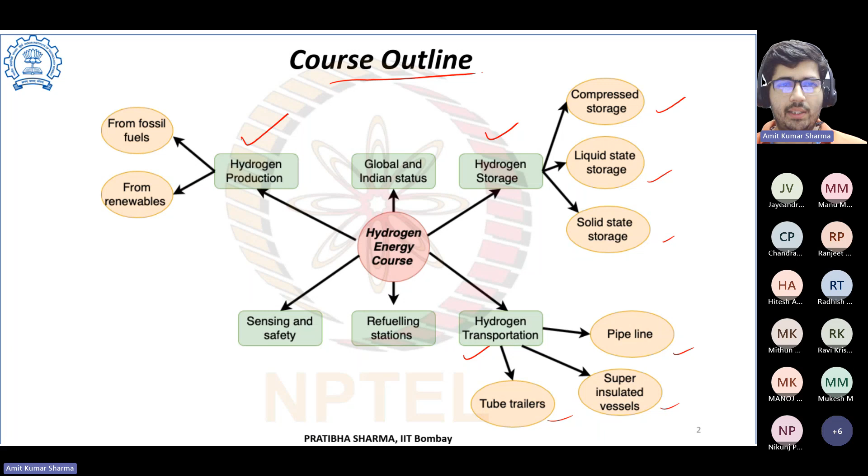So these are the areas which will be covered in this course. Today we will discuss week 2.

But first, last week there was a query regarding orthohydrogen and parahydrogen. So basically, the normal hydrogen mixture is having 75% orthohydrogen and 25% parahydrogen.

In orthohydrogen, the nucleus spins are parallel, and in parahydrogen, the nucleus spin is anti-parallel. This is the main difference between ortho and parahydrogen. Due to the parallel nuclear spin, they are having very high energy state as compared to parahydrogen.

So when you want to liquefy the hydrogen, you need to convert this remaining orthohydrogen to parahydrogen. Also, due to the different nucleus spin, they have different magnetic properties.

So parahydrogen is used in different magnetic techniques like MRI scans and also in NMR spectroscopy. So these are useful in these techniques, and they have some other uses too.

So to convert ortho to para, you need to decrease the temperature, and also you need a catalyst, so you can convert into parahydrogen.

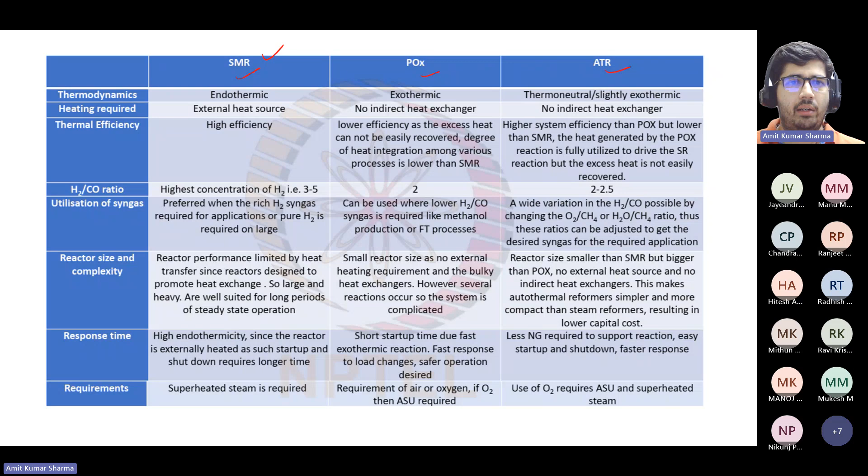We have covered steam methane reforming, partial oxidation, and autothermal reforming. We have also covered dry reforming, bi-reforming, tri-reforming. Let's see the major difference between these three first: steam methane reforming, partial oxidation, and autothermal reforming.

From the thermodynamics point of view, steam methane reforming is endothermic. What is the meaning of endothermic? Input heat will be required. And what is the input heat required for the SMR?

It's combustion fuel heat, we burn fuel only. And what is the amount of heat required? 206 kilojoules per mole will be required for the steam methane reforming.

The partial oxidation is an exothermic process, so it will release heat, and autothermal reforming is a combination of steam reforming and partial oxidation, so it is thermoneutral or slightly exothermic.

So basically, the heat that is required in steam methane reforming, we can use partial oxidation's released heat for the steam methane reforming. So it is a combination of both steam methane reforming and partial oxidation, thermoneutral or slightly exothermic.

Heating required: in SMR, external heat source is required. We need to supply external heat source. We can use flue gases and a heat exchanger, or we can also burn the methane. If you have some other heat source, you can use that to maintain the heat.

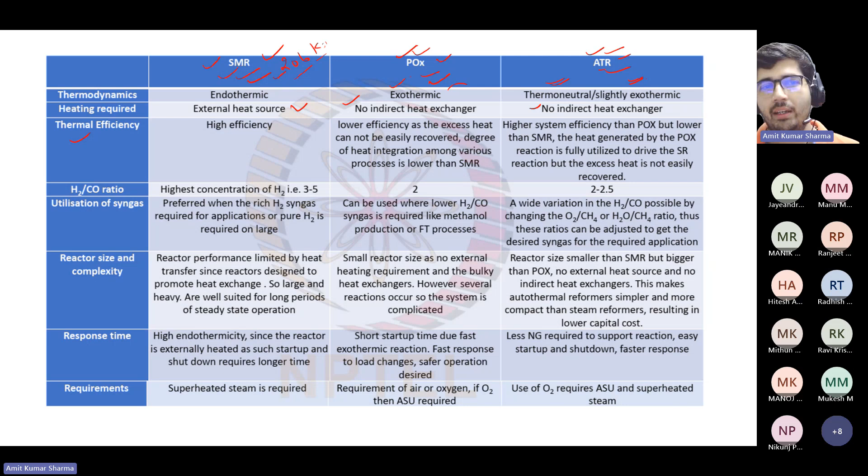Now the thermal efficiency: steam reforming has very high efficiency. Partial oxidation has lower efficiency because the excess heat cannot be easily recovered, since it is exothermic. Heat is a lower grade energy and it's difficult to recover.

It will also increase the cost because to recover the heat you need to install heat exchangers, which requires cost. The degree of heat integration among various processes is lower than SMR. In ATR, there's higher system efficiency than partial oxidation but lower than SMR, so it is in between.

The heat generated by the partial oxidation reaction is fully utilized to drive the steam methane reforming reaction, but the excess heat is not easily recovered. So some heat is used for the steam reforming and excess heat is not recovered.

Now the H2 to CO ratio. For SMR, it is the highest, with concentration of H2 being 3 to 5. For partial oxidation it is 2, and for ATR it's 2 to 2.5.

This is actually a very important parameter because some processes require a particular hydrogen to carbon monoxide ratio. Based on the requirement, they can select SMR, partial oxidation, or autothermal reforming. Sometimes if efficiency is important, they will go for steam methane reforming. But sometimes for a particular process, we require a particular H2 to CO ratio. If we don't have the exact ratio, then we need to maintain it, and in maintaining that ratio, we may need to expend more. So it's better to use a proper reforming method to directly get the required H2 to CO ratio. Based on that, many industry players select the reforming method as per their requirement of H2 to CO ratio.

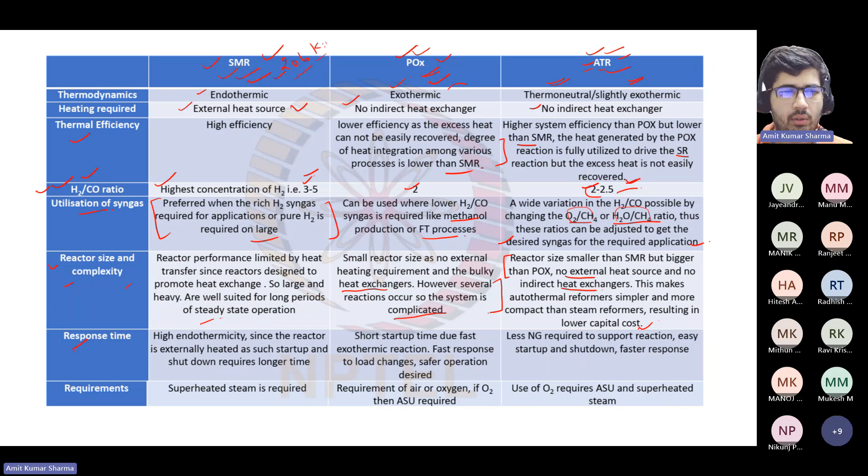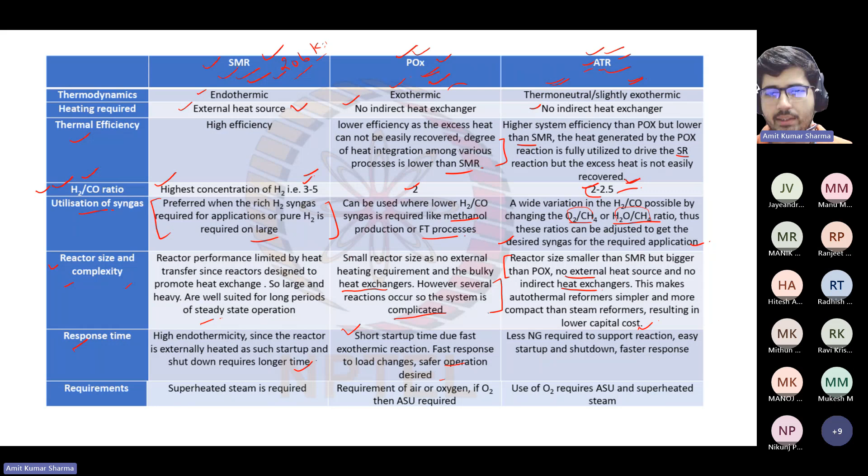Response time: SMR has high endothermicity, since the reactor is externally heated, so startup and shutdown require longer time. In partial oxidation, there's short startup time due to fast exothermic reaction and fast response to load changes, though safer operation is desired. In ATR, less natural gas is required to support the reaction during startup and shutdown, and there's a faster response. So basically ATR is better in terms of response time.

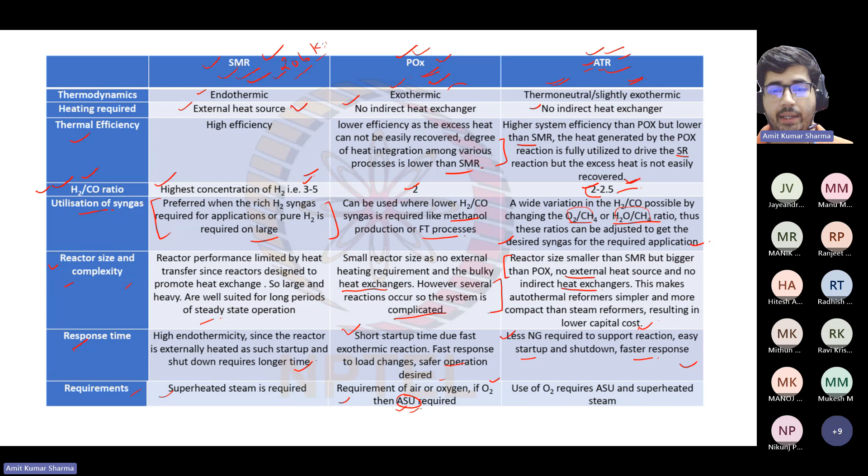Requirement: superheated steam is required in steam methane reforming. Requirement of air or oxygen - if O2 is used, then an air separation unit is required, because if you require pure O2, you need to separate out the nitrogen; otherwise, since nitrogen is inert, your product will have nitrogen also, which you may not require, so you need to install an air separation unit to separate the nitrogen. In ATR also, use of O2 requires an air separation unit and superheated steam - it's a combination of both, requiring both superheated steam and the air separation unit.

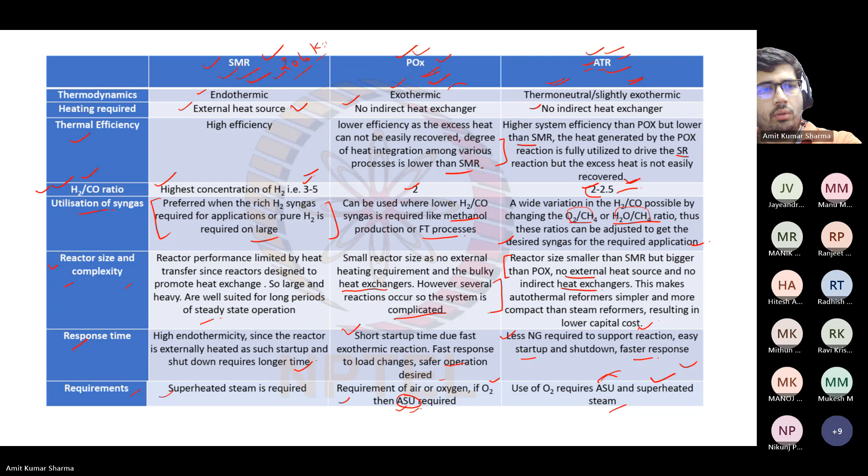So regarding the overall system, the SMR is heavy and large system. Partial oxidation is compact but complicated. ATR is simple and compact.

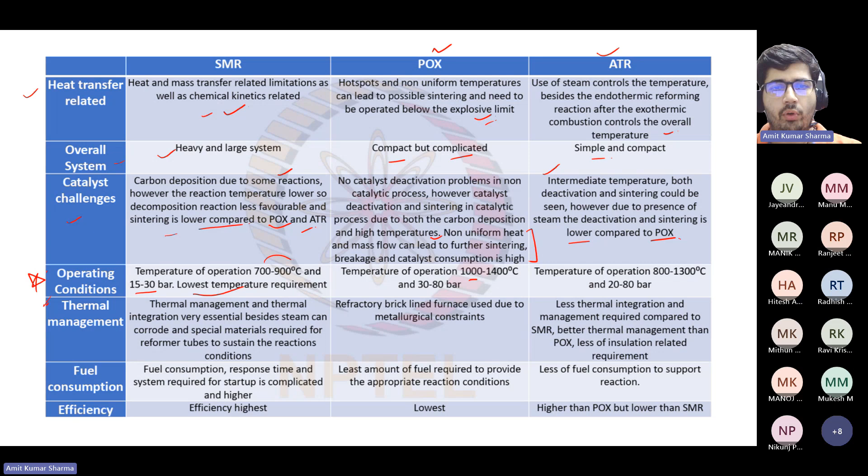Operating conditions are important. SMR is operated between 700 to 900 degrees centigrade and 15 to 30 bar, with the lowest temperature requirement. Partial oxidation operates at 1000 to 1400 degrees centigrade and 30 to 80 bar. ATR operates at 800 to 1300 degrees centigrade and 20 to 80 bar.

Thermal management: as we can see from the operating conditions, the temperature for SMR is not that high, so the management will be easier compared to these two processes. Thermal management and thermal integration are very essential.

Besides, steam can corrode, so special materials are required for reformer tubes to sustain the reaction condition. Because we are using so much steam, you need to also look into the corrosion aspect.

Partial oxidation requires refractory brick lined furnace due to metallurgical constraints. Because the temperature is very high, using a metal reactor will be difficult due to metallurgical constraints. So it's better to use a refractory brick lined furnace.

ATR requires less thermal integration and management compared to SMR. It has better thermal management than partial oxidation and less insulation related requirement, because the generated heat will be used for the SMR reaction.

Regarding fuel consumption, response time, and system required for startup - these are complicated and higher for SMR. It requires higher fuel, and also the response time is higher.

The least amount of fuel is required in partial oxidation to provide the appropriate reaction condition, with less fuel consumption to support the reaction.

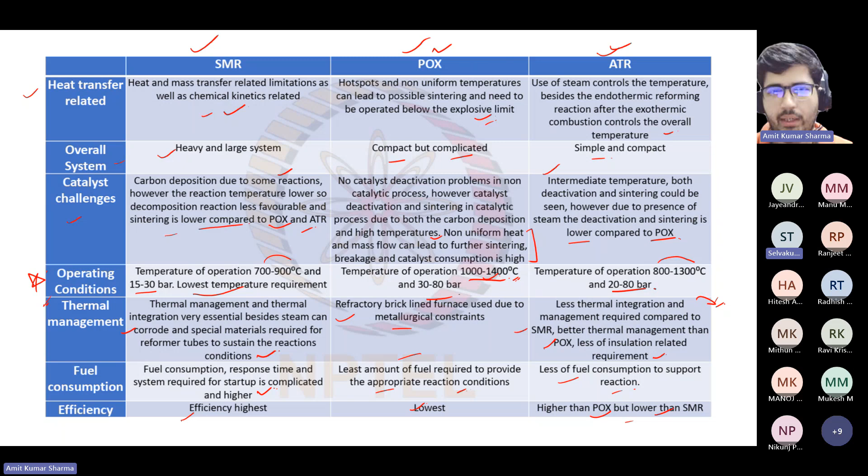Dry reforming we will come to later actually during the question, so at that time we will discuss that. Now we have covered steam methane reforming, partial oxidation, and autothermal reforming. The remaining reforming methods will be covered in between the questions.

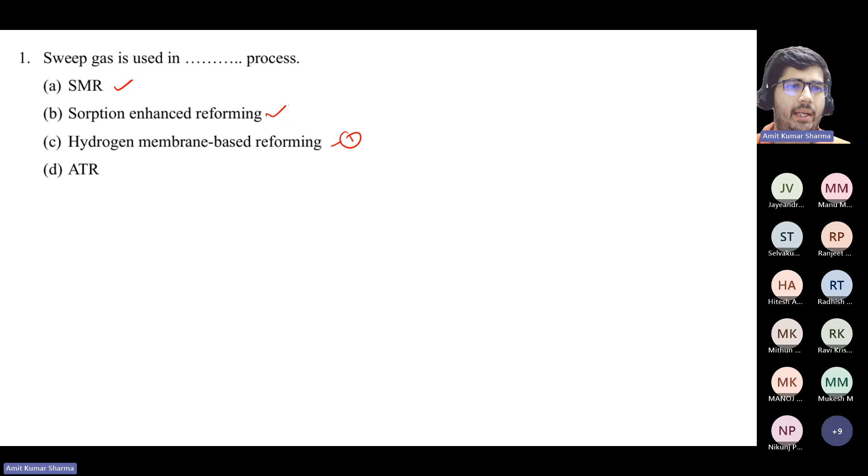What about ATR? As we discussed earlier, ATR is a combination of steam methane reforming and partial oxidation. So we require steam, oxygen, reactor, catalyst, and feedstock - these are the basic things.

Now let's come to hydrogen membrane based reforming. So what is this?

It is just opposite to the sorption. Here we take out hydrogen only through this membrane. The membrane is selected in such a fashion that it only allows hydrogen to pass through. And just to maintain pressure difference, we sometimes use sweep gas.

This is important, so to maintain the pressure difference - what is the meaning of pressure difference? Do you want to explain it more? Where do we use the pressure difference in membrane based reforming?

I was going through that video lecture, and in the construction there is a two drum kind of arrangement. All reactants are input in the outer drum, and then hydrogen passes through the inner one. So between both the drums, there has to be some pressure difference, only then will that membrane act. This is right, roughly how I have understood it.

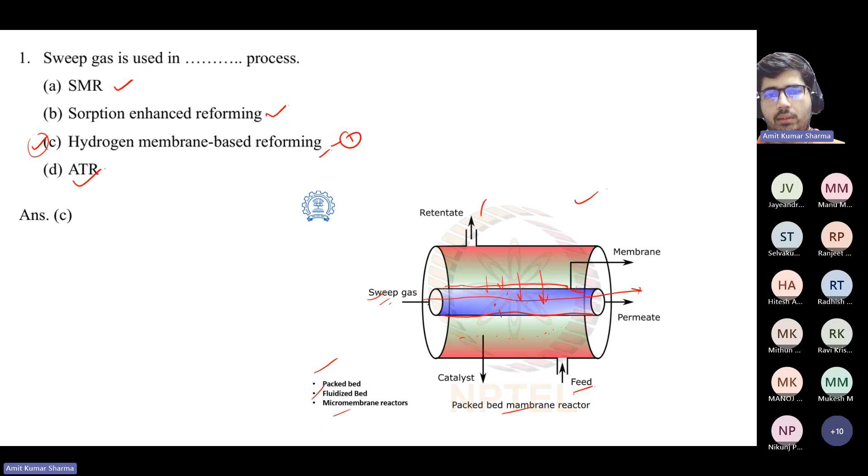So in the hydrogen membrane reactor, you can see the basic reaction of CH4 and H2O. It is the reaction of steam methane reforming, which converts into CO and H2. The removal of H2 favors the forward reaction.

Because whenever we are having reforming, there are also some side reactions. If we want to favor the forward reaction, we have to remove the hydrogen. So if we continuously remove the hydrogen, there will be less product available for the reaction, so that it will not take part in the side reaction - only the forward reaction will be favored.

Also, the conversion of CH4 is the same as conventional SMR, but at milder conditions. In the hydrogen membrane reactor, the conversion of CH4 is similar to steam methane reforming, but at milder conditions - you don't require that much temperature. Higher conversion, but at the same operating condition as that of conventional SMR.

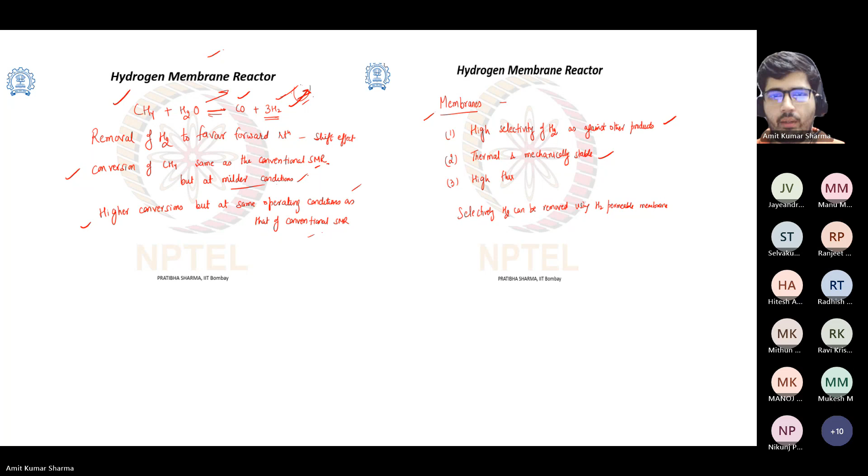Also regarding the membrane, it should have high selectivity of H2 against other products. Whenever you select the membrane, it should have high selectivity of hydrogen. It should be thermally and mechanically stable. These are also the conditions regarding the membrane - it should also be economical.

So basically the transport mechanism of hydrogen inside a palladium membrane: if you have a palladium membrane, it follows a solution diffusion mechanism. Hydrogen molecule is adsorbed onto the surface of the membrane, then it is split into hydrogen atoms. These atoms go across the membrane through diffusion and then recombine again into hydrogen molecule on the low pressure side of the membrane, then it is desorbed from the surface. This is the phenomena.

By the way, this is a palladium membrane.

Okay, Selva Kumar, you want to say something? Yes, what is the term selectivity, hydrogen selectivity?

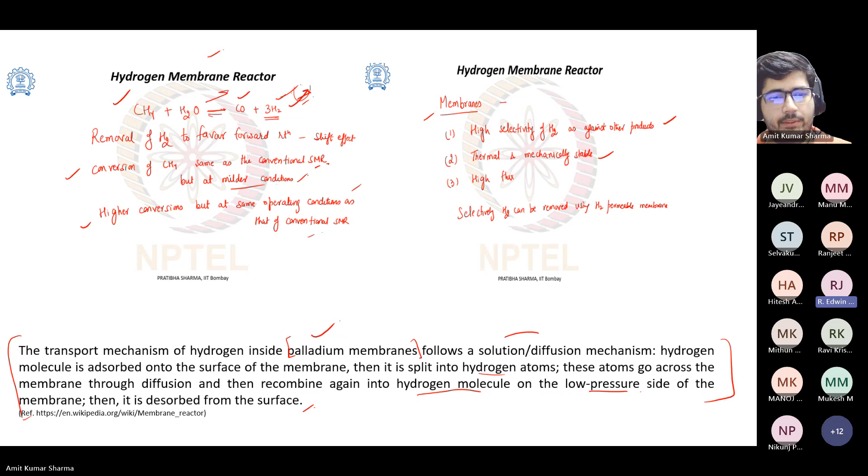Okay, selectivity. So you can see there is a reaction. Suppose if we have a reaction like A plus B going to C plus D. We want to form our main product, our target is D. We want more D. So we want to have, and also maybe the reverse of the reaction is possible, so it depends on the equilibrium of the reaction. To have more D, then...

As compared to A and B, basically you want the main forward reaction, so you will maintain the conditions like that so your reaction will be forward favorable, so that you will have more amount of D. That's selectivity. If you want more C, you will maintain the conditions, because there are also side reactions, so you will maintain conditions to have more amount of C. That will be selectivity of C and selectivity of D.

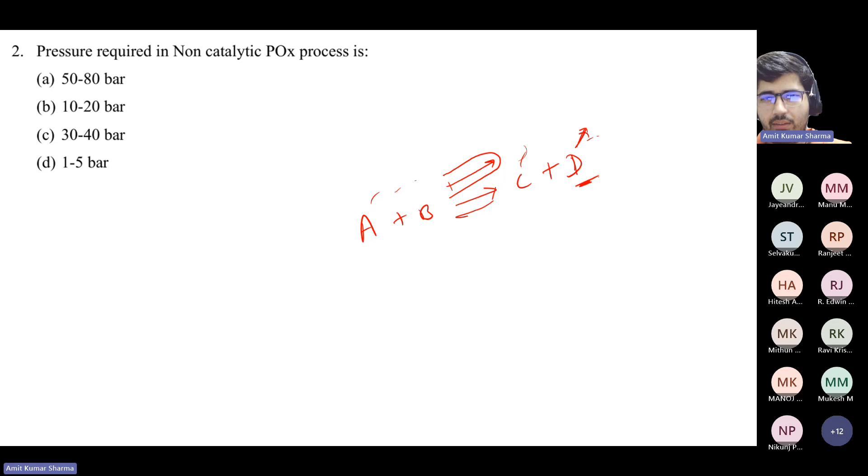So we want to see the hydrogen selectivity, the condition will be like that, so there will be more hydrogen. I'm just forgetting the exact formula. There is also a way to express selectivity. Anyone remember? It's the ratio of the product to the reactant, I think - the desired product to the undesired reactant. Am I correct?

Yeah, correct. Actually, last week in the calculation discussion, I saw this term. In that particular sum, there was a question for calculation of hydrogen selectivity, so that's why I raised this question.

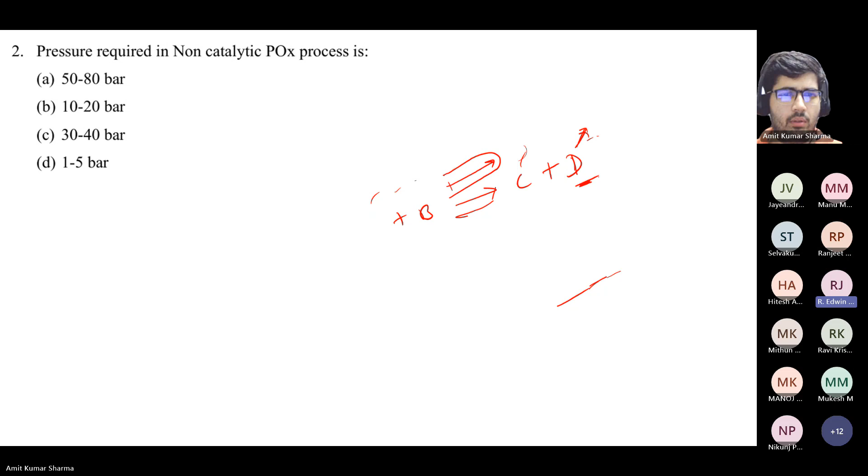Okay, so the next question is: the pressure required in non-catalytic partial oxidation process is? What is the pressure required in non-catalytic partial oxidation process? Sir, I think it's 50 to 80. Okay, so these kind of questions you can only answer if you have gone through the videos, because these are direct questions. Anybody else? Yes, 50 to 80 bar, correct.

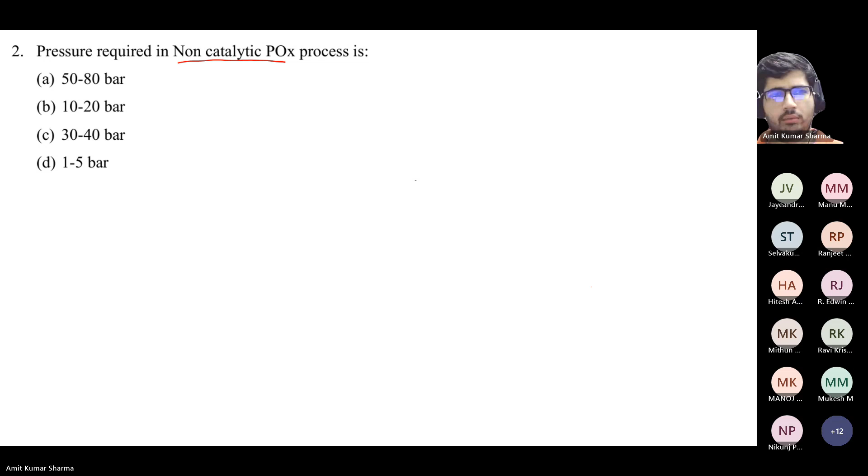Okay, so let's see what is non-catalytic partial oxidation? Catalysts are not used in partial oxidation without catalyst. Because the name itself is saying non-catalytic, it means there will be no catalyst. But what are the applications of this process? Where do we use this process?

To avoid the deposition of sulfur, so that we can prefer non-catalytic. No, because it requires very high pressure, and since catalyst is not there, the temperature will be very high. Because if you are having a catalyst, that can lower the activation energy for the reactions to occur. But with non-catalytic, you need higher pressure and temperature. So only for this reason, it's not advisable.

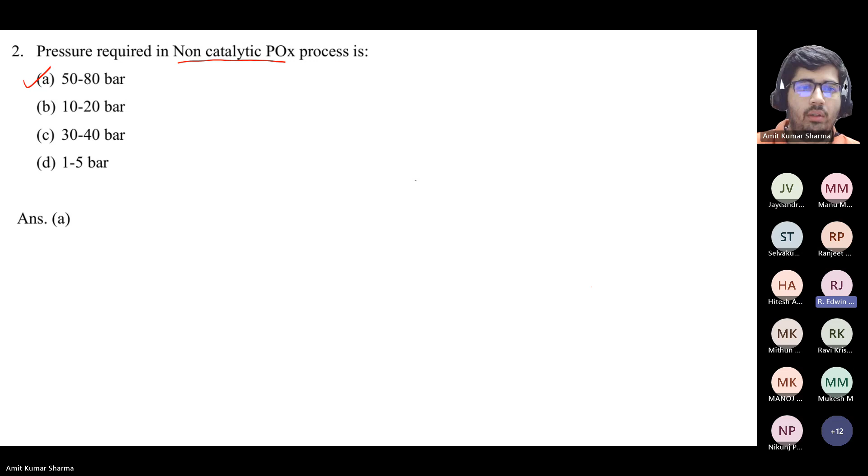So these are the conditions: in the absence of catalyst, the temperature is higher. You can use gaseous, liquid or solid hydrocarbons. There will be no catalyst poisoning challenges. You can use air or oxygen. Pressure you need to maintain is 50 to 80 bar. The temperature is 1200 to 1500 degrees centigrade, very high. The hydrogen to CO ratio depends on the feedstock composition and the quantity of steam added - basically we are varying the ratio of steam to carbon.

There are two commercial processes available in the market: Texaco Syngas Generation Process (TSGP) and Shell gasification process. You can read more about these two processes. The difference between the two is in gas cooling process, waste heat recovery unit, design of nozzle, and removal of soot.

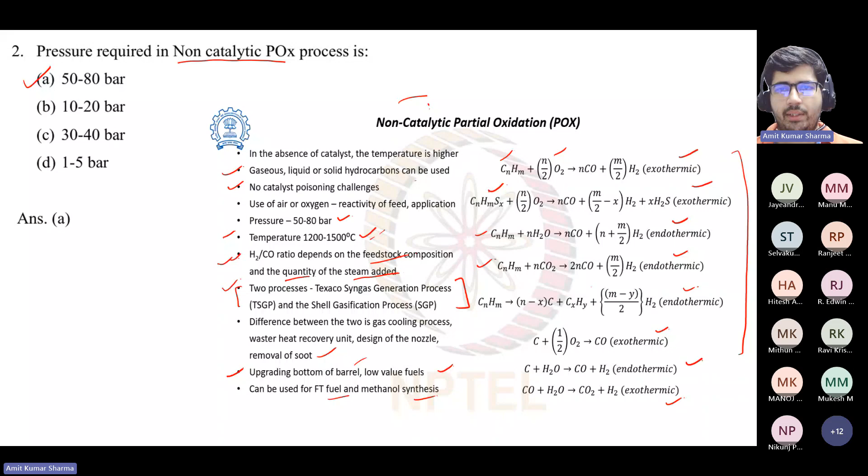By changing the quantity of steam and other operating conditions, we can change the amount of H2 to CO. So basically we are changing the reaction rates and these things.

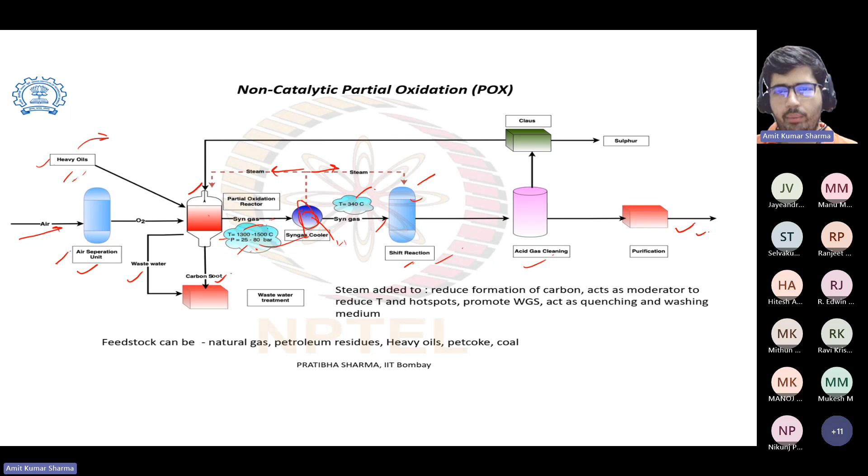Then you can use acid gas cleaning, and you can have pure hydrogen, and you can also remove the sulfur.

Steam is added to reduce formation of carbon, acting as a moderator to reduce temperature and hotspots, because it's a very high temperature, and some parts may have low temperature, creating temperature gradients and hotspots. Steam acts as a moderator to maintain this, also promotes the water gas shift reaction, and acts as a quenching and washing medium. Feedstock can be natural gas, petroleum residue, heavy oils, petcoke and coal. So you can see the variety of feedstock, different kinds of heavy to lighter hydrocarbons, and we can reform into hydrogen.

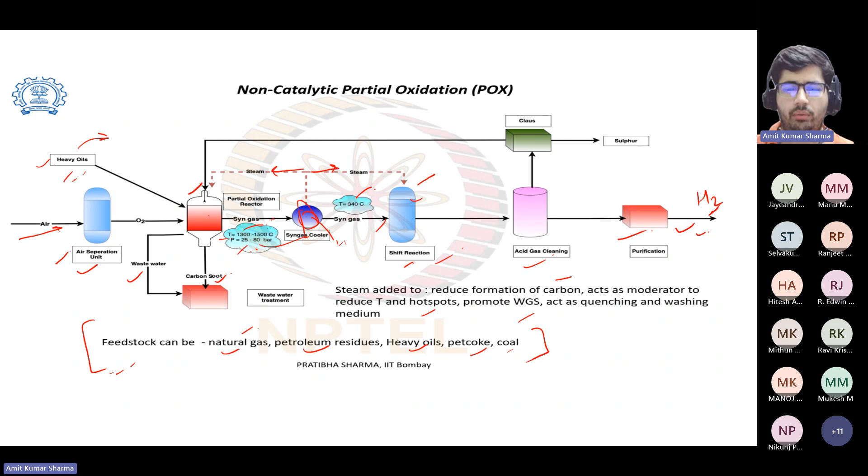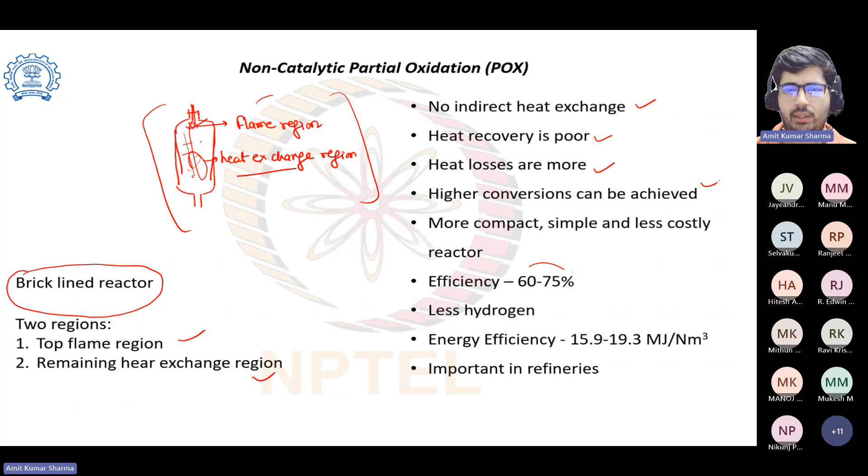High conversion can be achieved, very high conversion. More compact, simple and less costly reactor, efficiency you can say 60 to 75%, less hydrogen. So energy efficiency is 15.9 to 19.3 megajoule per normal meter cube.

Important in refineries, because in refineries they have different kinds of residual hydrocarbons, so they can use those because they cannot directly dump those hydrocarbons, so they can use in non-catalytic partial oxidation process to further convert them to hydrogen.

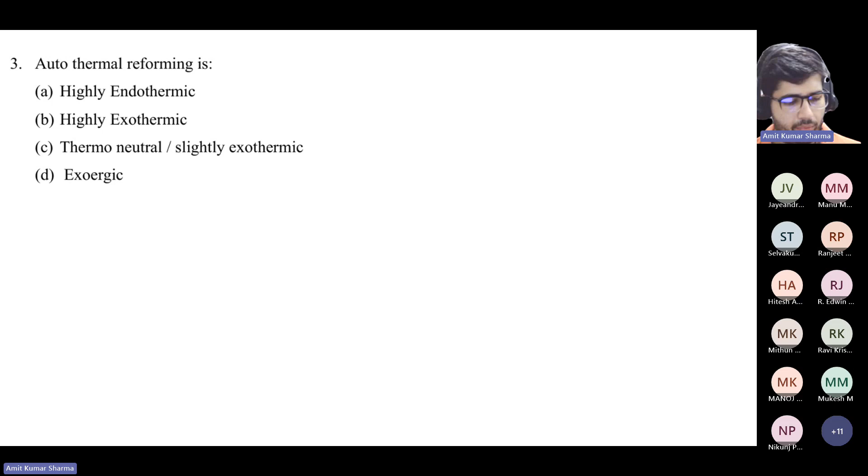So what about the autothermal reforming? What is it a combination of? SMR and partial oxidation. So the heat required for the SMR will be supplied from the partial oxidation reaction. The correct answer is C.

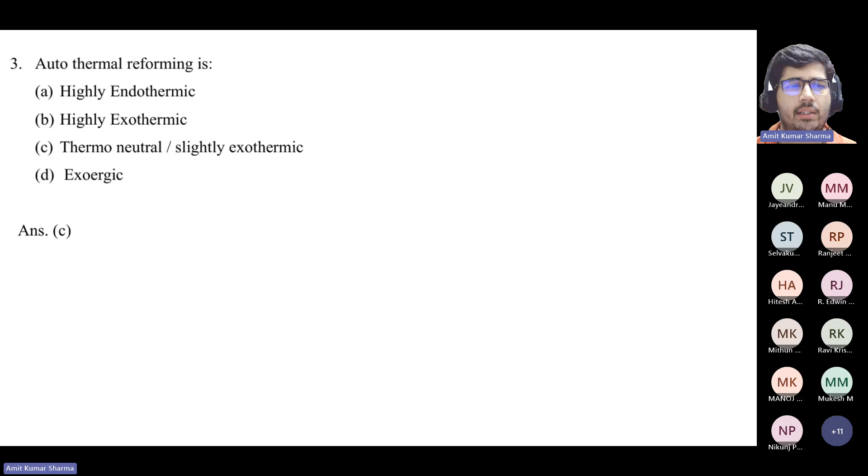So this is about the autothermal reforming. This reforming has both the advantage of steam methane reforming and partial oxidation. You can maintain the H2 to CO ratio and also it's a thermoneutral process.

So the oxidant here we use O2 or air. If you are using air, then there will be some nitrogen, and as per your requirement, suppose if you are using that in the fertilizer industry and you want to form ammonia, so you can use air as an oxidant, and if you want pure hydrogen, then you can use oxygen as an oxidant. We already covered that you need an air separation unit to have pure oxygen and the combination of steam.

So there are two oxidants available, O2 and steam. Advantage is thermoneutral process and slightly exothermic, higher H2 to CO ratio than partial oxidation. Heat required is supplied internally, so we are not supplying the heat from external means. The heat is supplied internally using the partial oxidation exothermic reaction.

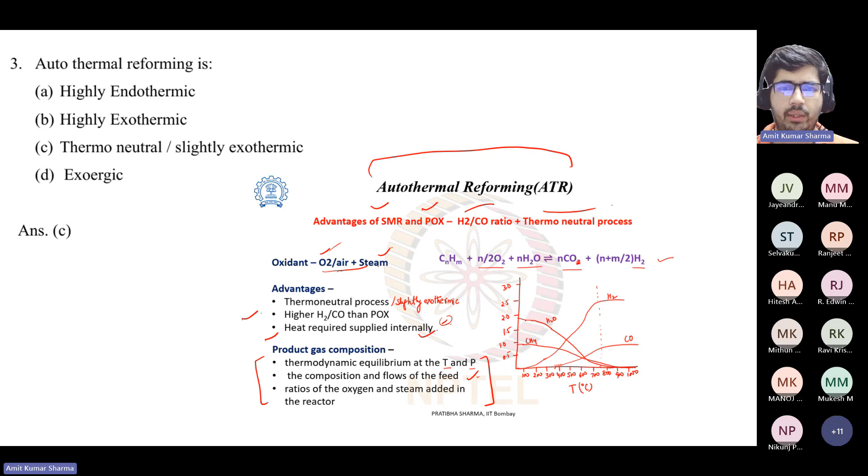The product gas composition is at thermodynamic equilibrium at a given temperature and pressure. The composition and flows of the feed, the ratio of oxygen and steam added in the reactor - the composition depends on these things: equilibrium temperature and pressure, the flows and the feed, the steam to carbon ratio, and the steam to carbon to O2 ratio. So the product gas will depend on these things.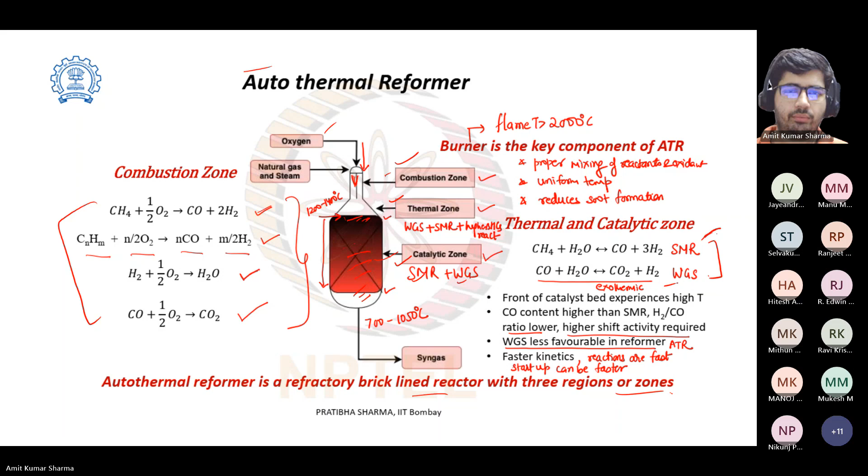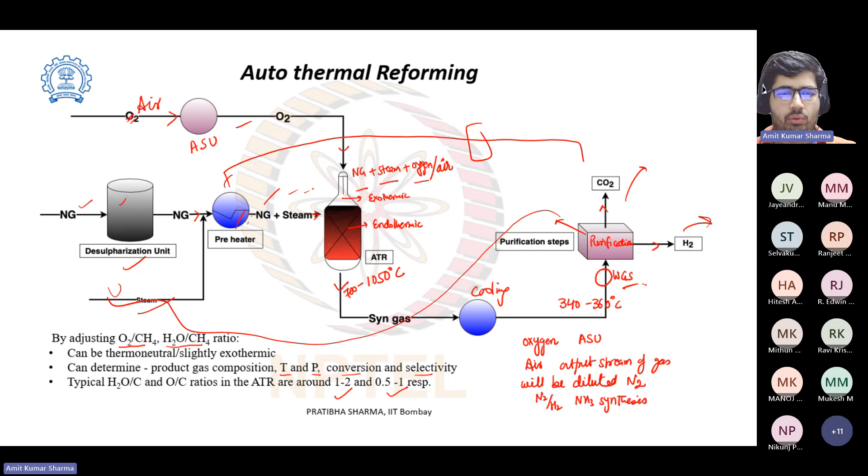By adjusting the oxygen to methane and steam to methane ratio, the process can be thermoneutral or slightly exothermic. It can determine product gas composition, temperature, pressure, and conversion selectivity. Typical H2O to carbon and O to C ratio in the ATR are around 1 to 2 and 0.5 to 1 respectively. These are the typical ratios for the ATR.

So the question is, hydrogen to carbon monoxide ratio in dry reforming under ideal condition is? The answer is 1. What is the reaction of dry reforming? CH4 plus CO2 gives 2CO plus 2H2. This is also considered stoichiometric reforming, so H2 by CO ratio equals 1.

The heat required for this reaction is 247 kilojoule per mole. What was the heat required for steam reforming in the previous slides? The steam reforming required 206 kilojoule per mole, and dry reforming required 247 kilojoule per mole. So this reaction is more endothermic.

The advantage of dry reforming is that both methane and CO2 are greenhouse gases and we are using them, so basically we are reducing greenhouse gas emissions. If natural gas has both in high concentration, then dry reforming is preferred.

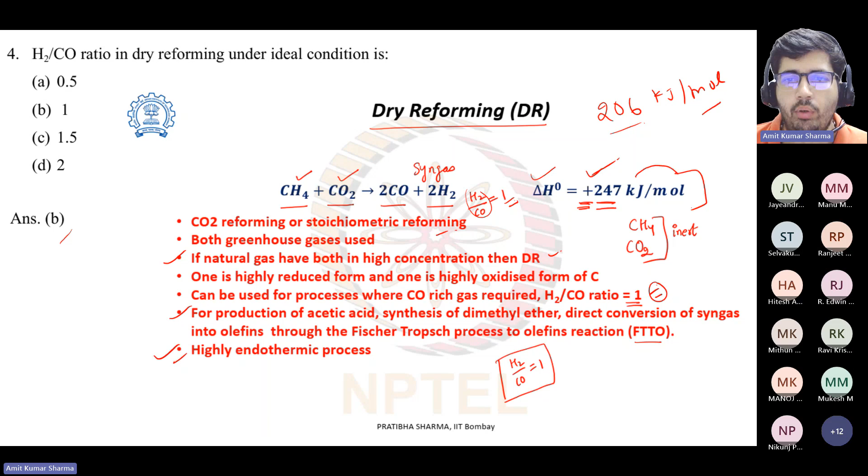It's a highly endothermic process because it requires 247 kilojoule per mole of heat.

So the possible reactions in dry reforming: the first reaction is CO2 plus H2 giving CO plus H2O. What is this reaction? We have seen this reaction already.

It is the reverse of the water gas shift reaction. The forward reaction is normally CO plus H2O, where CO reacts with steam to generate hydrogen and carbon dioxide. We use a water gas shift reactor after the reforming reactor to convert the remaining CO into hydrogen. But sometimes if the temperature is a little high, and conditions are favorable for the reverse water gas shift reaction, then this reaction will occur: CO2 and H2 react to form carbon monoxide and steam, and it's endothermic.

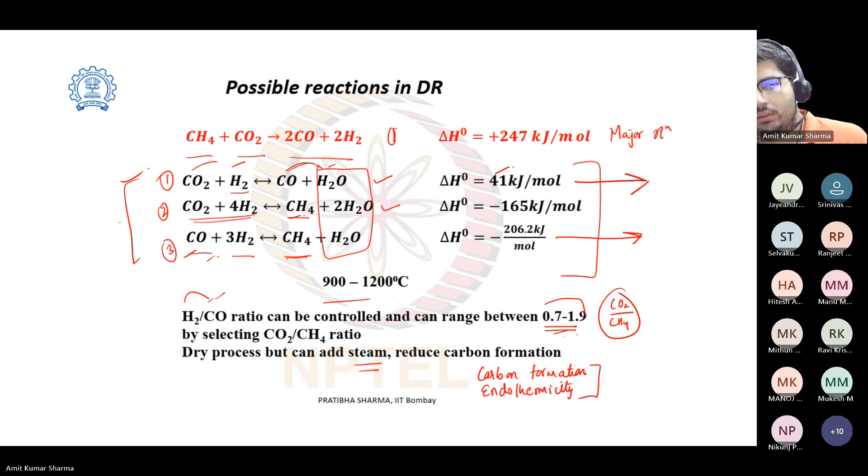Also, due to carbon deposition, there will be catalyst deactivation. And if catalyst deactivation occurs, after some time your reactor will fail. There are 4 reactions responsible for catalyst deactivation.

The first is the Boudouard reaction: 2CO gives CO2 plus C. The carbon monoxide dissociates into carbon dioxide and carbon. This carbon will deposit on the catalyst surface, and it can detach the catalyst from the support, and decrease the active area of the catalyst - in multiple ways it will finally deactivate the catalyst. It is an exothermic reaction and favorable at lower temperature.

Then reduction of CO: carbon monoxide plus hydrogen gives H2O plus C. It is an exothermic reaction that occurs at lower temperature but with higher Gibbs energy, so it's not the preferred route except when there is high partial pressure of H2.

Methane decomposition: CH4 gives carbon plus 2H2. It is favored at high temperature, an endothermic reaction. Reduction of CO2: CO2 plus 2H2 gives carbon plus 2H2O, which is exothermic.

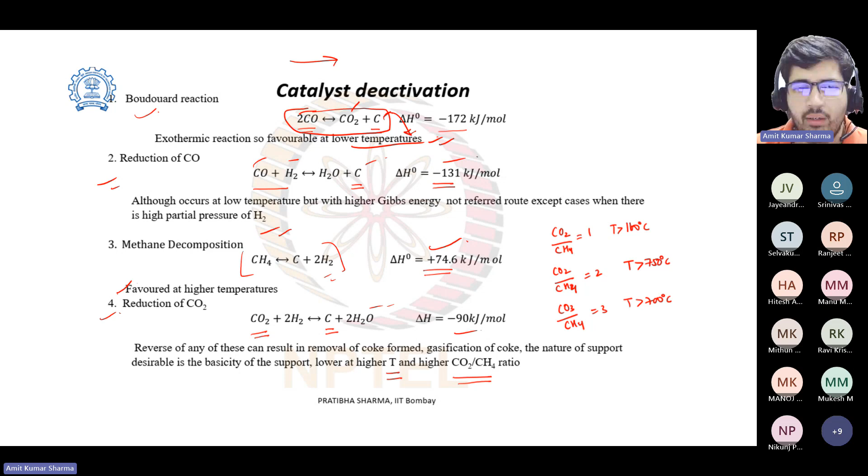So if these reactions occur in the forward direction, they deposit coke, and if they occur in reverse direction, they remove the coke. So if you have excess steam, you can basically remove the coke.

That's why steam is advisable to add in the reforming. So for gasification of coke, the desirable nature of support is basicity, and it is lower at higher temperature and higher CO2 to CH4 ratio.

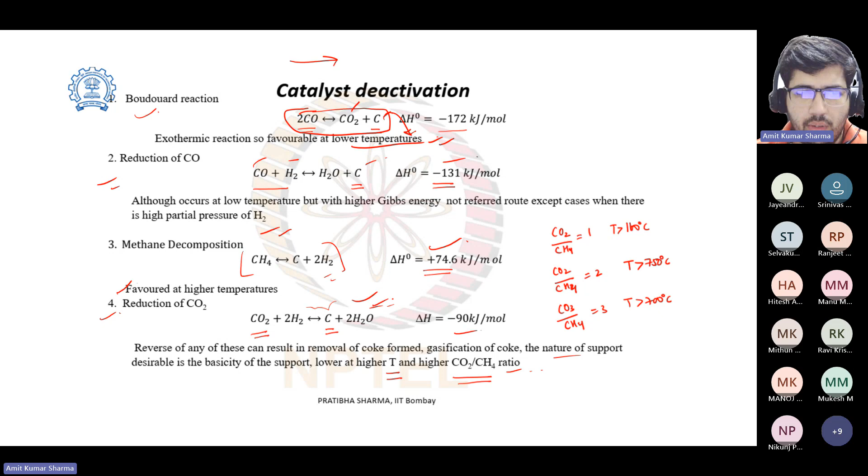So as we have discussed dry reforming, which type of carbon is the question. We know that carbon deposition is a very critical phenomenon for dry reforming, and it can deactivate the catalyst.

The correct answer is option D. It means that there will be formation of whisker carbon, pyrolytic carbon, and gum carbon.

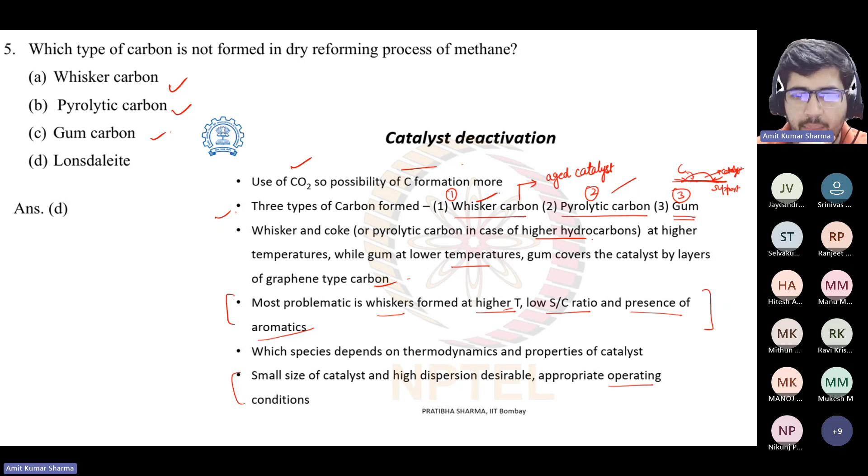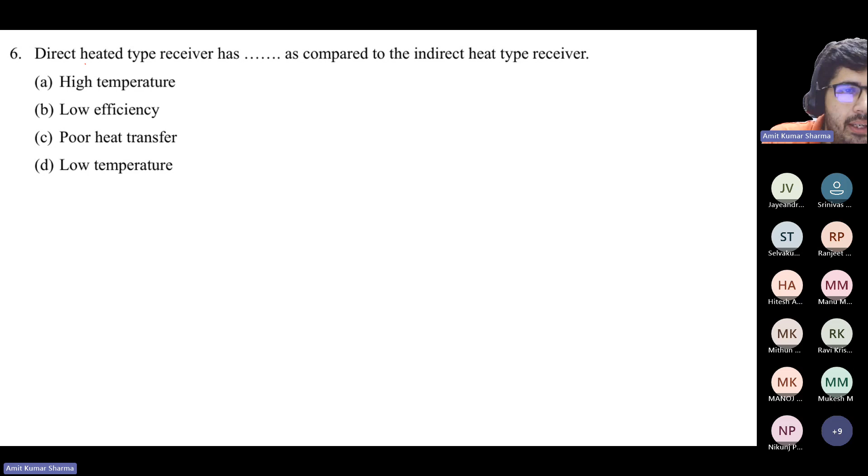So if we are considering the heat type receiver, anybody want to say something? From which topic is this question? This is alternate energy, the heat source for reforming. So what is the heat source in this question?

It will be high temperature. Is it sunlight? Yes, solar, right. Anybody else?

So this question is from the topic of using solar energy for reforming. The question is, direct heated type receiver has what as compared to the indirect heat type receiver.

Option A: high temperature, lower efficiency, poor heat transfer, or option D: low temperature. Now we have conflict, A high temperature, D low temperature. Those who are with high temperature, if anybody wants to explain, please explain.

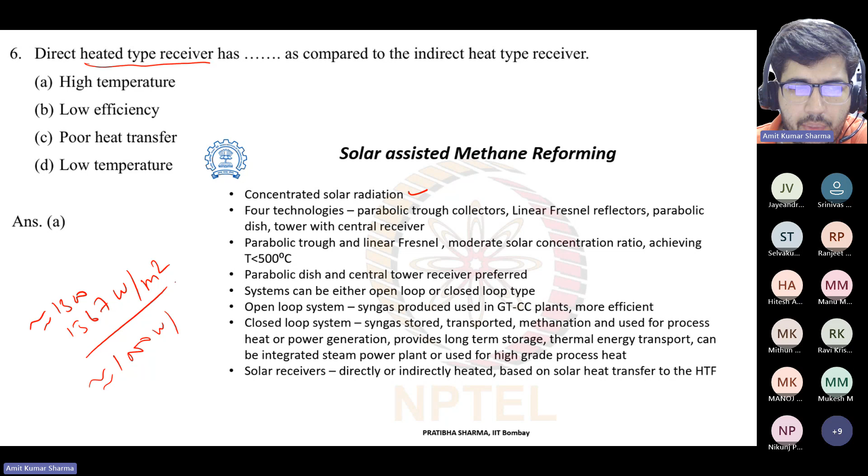Does anybody know the solar radiation per meter square, the solar energy per meter square? This is the solar constant, which is nearly around 1367 watts per meter square. Roughly we can get around 1000 watts per meter square on the actual surface, due to clouds and other phenomena.

If we use some type of concentrating equipment that can focus this energy at a particular point, we can achieve the required heat to maintain the temperature of the reforming reactor. We have four technologies for this: parabolic trough collectors, linear Fresnel reflectors, parabolic dish, and tower with central receiver.

The parabolic trough and linear Fresnel have a moderate solar concentration ratio, achieving temperatures less than 500 degrees centigrade. The parabolic dish and central tower receiver are preferred because they can achieve the temperature required for reforming.

We can operate either an open loop or closed loop system. In the open loop system, the syngas produced from reforming is used in gas turbine combined cycle plants to generate more power, making it more efficient.

In the closed loop system, we store the syngas, transport it, and can perform methanation to convert the syngas into methane, which can again be used for reforming, process heat, or power generation. It provides long-term storage, thermal energy transport, and can be integrated with a steam power plant or used for high-grade process heat.

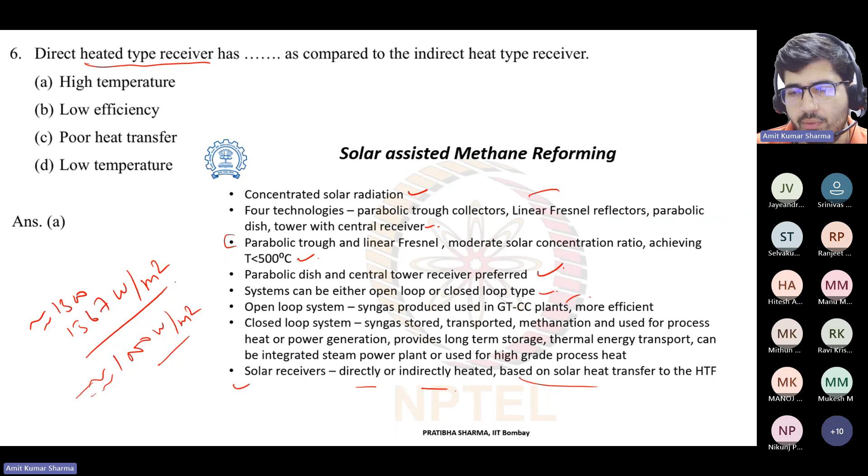For solar receivers, we can use directly or indirectly heated types based on solar heat transfer to the HTF. In the indirectly heated receiver, sunlight is reflected to the reactor. We have three kinds of reactors here, with a wall and product gas inside being heated, acting like a heat exchanger, it is allothermal, with a kind of catalyst bed.

You can use mediums for heating like air, molten metal, or molten salts. Heat transfer to the working fluid does not take place upon the surface which is exposed to the incoming solar radiation. This surface is exposed to radiation, but the actual heat transfer happens elsewhere - it's an indirect process.

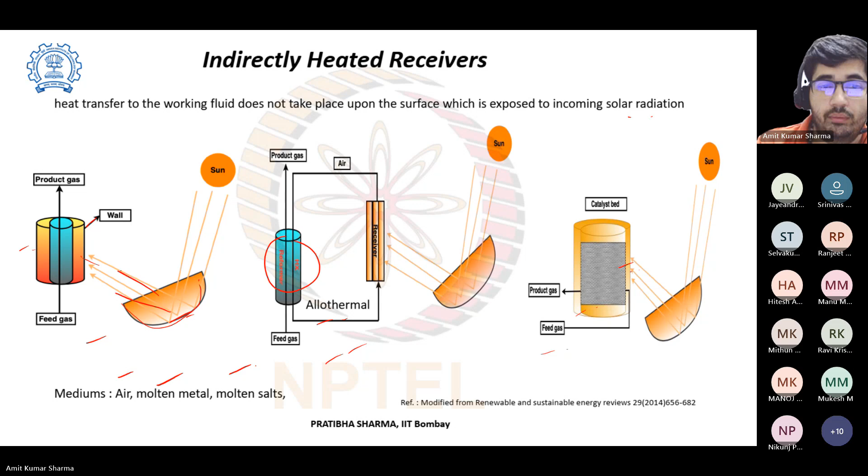In the directly heated receiver, there will be a stationary absorber and volumetric receiver family, with an absorbing matrix that absorbs and transfers heat to the working gas or methane. It can sustain thermal stresses. Radiation is absorbed by the materials and transferred to the gaseous heat transfer medium. Some honeycomb type or other structure absorbs the energy and transfers it to the gaseous molecules, achieving high heat flux, high temperature, and higher efficiency.

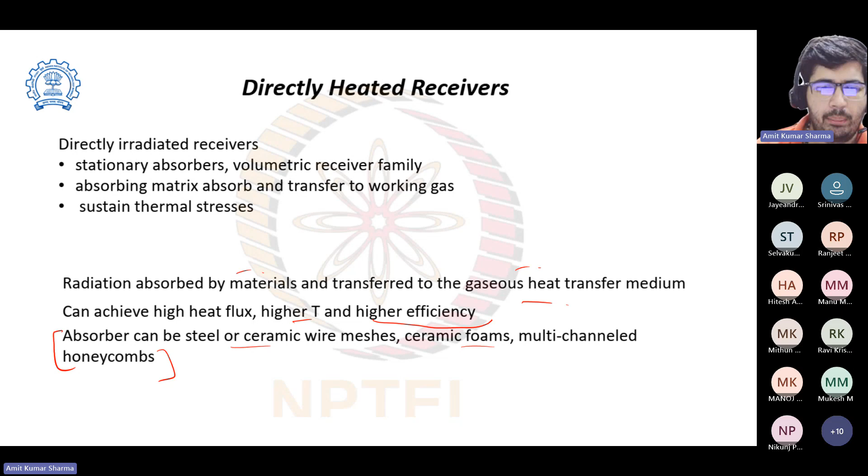The absorber used for the heat receiver can be steel or ceramic wire meshes, ceramic foams, or multi-channel honeycombs.

Next question: what is the conversion percentage of methane using plasma? The answer is 98%. I again forgot to use the animation, sorry. So what about this plasma reforming?

First, what is plasma? Plasma is the fourth state of matter. And what are the remaining three states?

So it is the fourth state of matter. The remaining three states are solid, liquid, and gas. So it consists of electrons, ions, radicals, neutral molecules, and ions.

It's created by applying electric field. Discharge created in this way will depend upon the gas characteristics, electrode arrangement, and applied voltage. So the plasma will depend on these things: electrode arrangement, applied voltage, and the gas characteristics.

The plasma produces not only the ideal temperature required for the reaction, but also free radicals and ions can be used for SMR, partial oxidation, and autothermal reforming. So it will also give the heat required for the reaction, but also free radicals and ions to support these reactions.

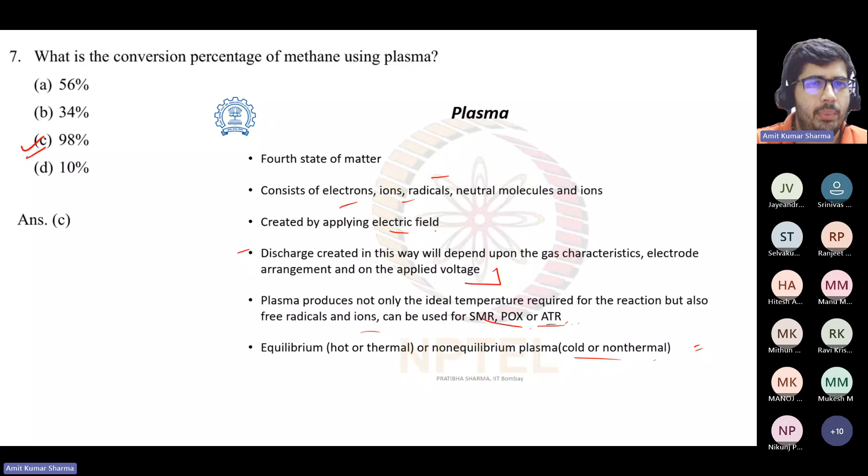So the correct answer is 98%. So the conversion percentage of methane using plasma is 98%.

Now the thermal or non-thermal plasma. Thermal plasma is created at higher pressure, by applying either DC, AC or RF source, and has temperature around 2000 to 20,000 Kelvin with high energy density, created by arc or plasma torch and inductively coupled RF discharge.

On the other side, non-thermal plasma is created at low pressure and temperature. So this is a major difference. The thermal plasma is at higher temperature and pressure, applying DC, AC or RF, and the non-thermal plasma is at low pressure and temperature.

The temperature of electrons and heavy particles is different, using lower power. It requires low energy density, like glow discharge, gliding arc, dielectric barrier, and corona discharge, and pulse discharge, etc.

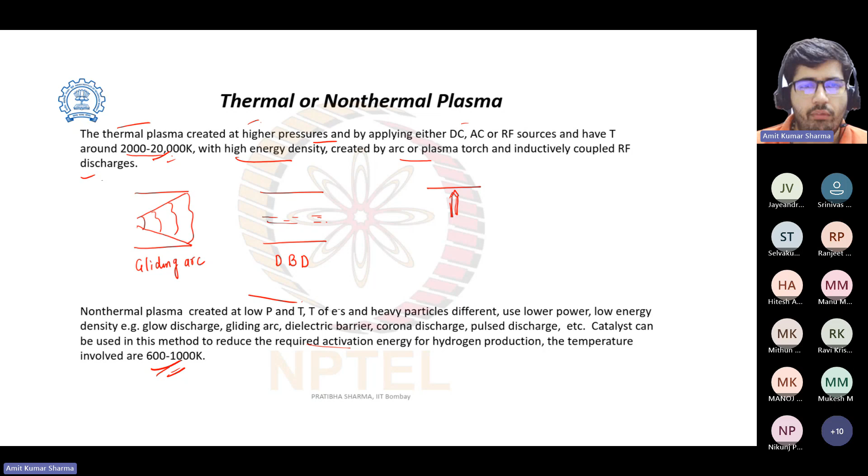Catalyst can be used in this method to reduce the required activation energy for hydrogen production. The temperatures involved are 600 to 1000 Kelvin. So the difference is huge. This is the difference between the thermal and non-thermal plasma.

Now Amit, the non- Amit, sorry to interrupt, I have a meeting, so I have to leave. Yeah, okay sure, no issue. Thank you, no issue, yeah.

Now the non-thermal plasma reforming occurs at low pressure, low temperature, catalyst used which can change the pathway of reaction as active species gets absorbed on the catalyst surface. It can change discharge characteristics, ionization and dissociation characteristics, chemical reactions by the high energy electrons.

For high electron energies, formation of C2H2 occurs by removing hydrogen, while if lower energy is involved, then less hydrogen is removed from the CH4, resulting in C2H6. So these are the things you can go through. You can use a reference book to learn more about this plasma reforming.

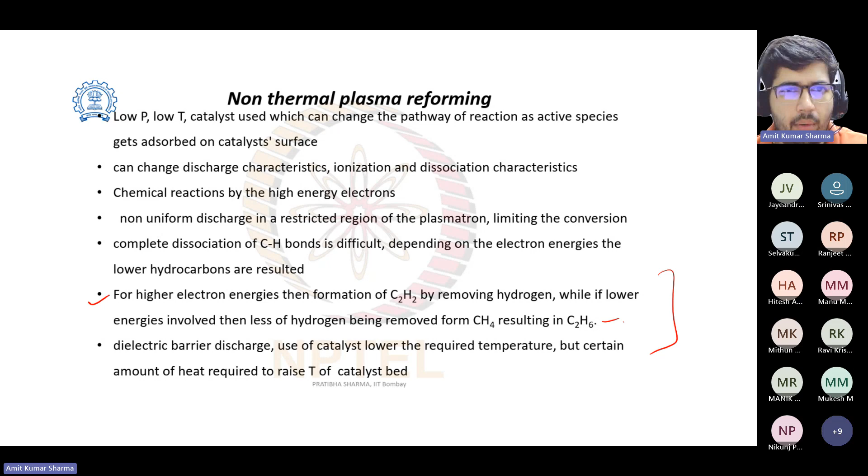In thermal plasma reforming, high temperature leads to carbon-hydrogen bond breaking to form solid carbon and hydrogen. So because there is a high temperature, the carbon-hydrogen bond breaks, so you can say methane cracking happens. That breaks the bond and solid carbon is deposited on the catalyst, whether or not a catalyst is used.

It offers higher capacity, high energy conversion efficiency, high energy density, and chemical active species which can result in better conversion. Conversion is higher, as high as 98% using DC arc plasma.

The plasmatron or thermal plasma operated at very high power densities can result in the required reaction with formation of intermediates like active species and free radicals. It has fuel flexibility—operating at very high temperature, so any fuel can be reformed—better control of process, and getting desired gas composition can be achieved.

Various demonstrations with different plasmatrons have shown 40 to 50% hydrogen in the product gas composition, and specific energy consumption around 40 megajoule per kg H2. So the specific energy consumption is around 40 megajoule per kg of hydrogen.

It is a highly endothermic process. Better conversion can be achieved with thermal plasma, either with RF or microwave power.

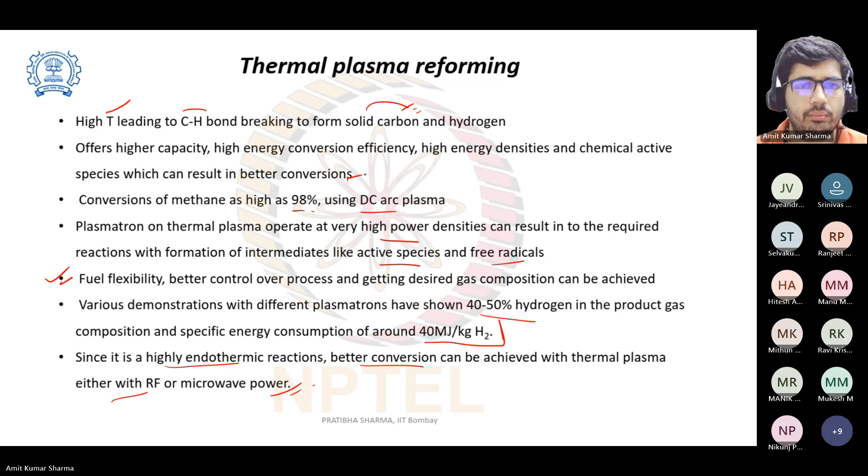So in summary, we can say the various plasmatrons demonstrated, the parameters, and the advantages: fast reaction start, small and compact, fuel flexibility, good control of the process, good control over the product gas composition, tolerance to poisoning and carbon deposition.

Disadvantage is the hydrogen delivered at lower pressure and dependence on electric energy. So because we know that due to the density, the lower density of hydrogen... what is the density of hydrogen? Anybody?

0.08 density, kg per meter cube is the unit.

Is it at normal temperature and ambient condition? Yes. So whenever reporting density, pressure and temperature are very important because for a gas, density can change with pressure and temperature, so you need to mention the operating conditions. The density is very low, so to use hydrogen we need to compress it. Since hydrogen is delivered at lower pressure, we need to spend a lot of energy in multi-stage compression to compress it up to maybe 600 or 800 bar, as per the requirement.

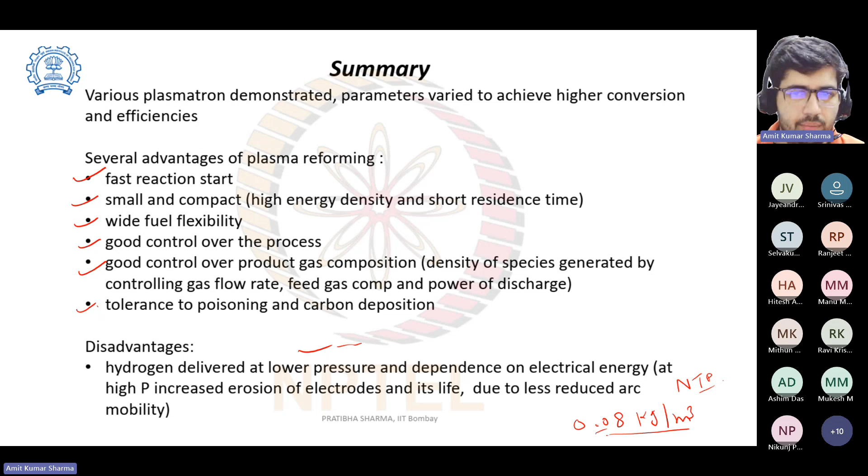What is the temperature of the flame in the burner region in the ATR process? In the ATR process, how many regions have we covered? We have covered three zones or regions. One region is combustion, then the thermal zone, and the catalytic zone.

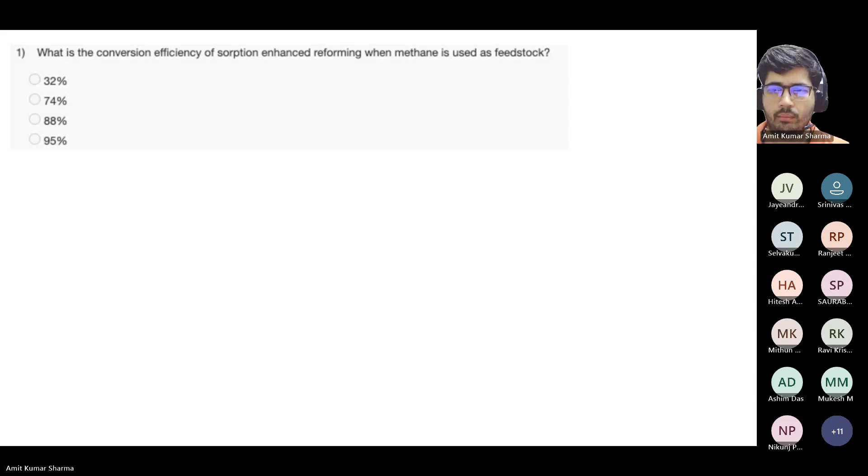Now, what is the conversion efficiency of sorption enhanced reforming when methane is used as feedstock? One answer is 88%. Think about sorption enhanced reforming and let me know. Another answer is 95%, because the purity of hydrogen would be higher due to sorption enhancement. So we have two answers, 88 and 95. Let's see the correct answer: it is 88%.

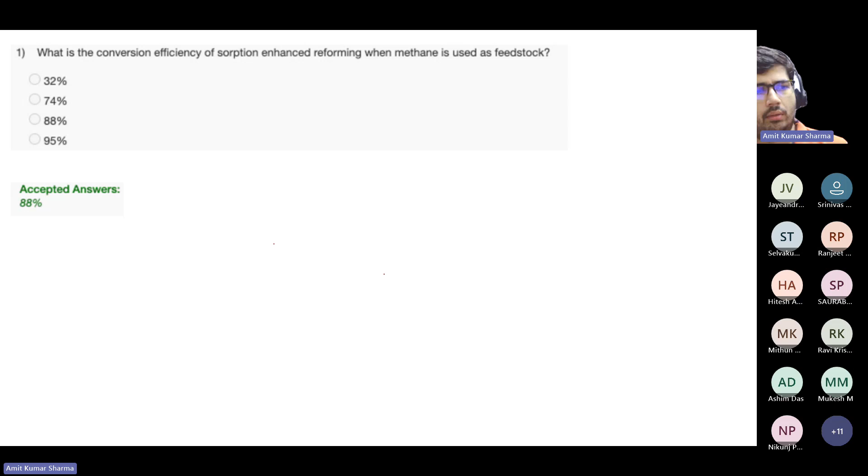So first, what are the challenges with conventional reforming that require a different reforming approach? The challenge is that conventional reforming reactions like steam reforming and dry reforming are highly endothermic, and the process is very complicated. Also, if you want to integrate with another process, you need some intermediate process, so there will be challenges for integration. Also, complete recovery of H2 is not possible.

Also, the endothermic and exothermic reactions will both be there, so it's difficult to have a single reactor. We cannot have a single reactor because we also need the water gas shift reaction, so we need a different reactor for that. These are the challenges.

In steam methane reforming, methane reacts with steam forming 1 mole of CO and 3 mole of H2. If you compare, there are 2 moles in the input and 4 moles in the output, so the moles are increasing. When the volume is expanding, the reaction will be favorable in the forward direction at lower pressure and higher temperature. The delta H is 206 kilojoule per mole.

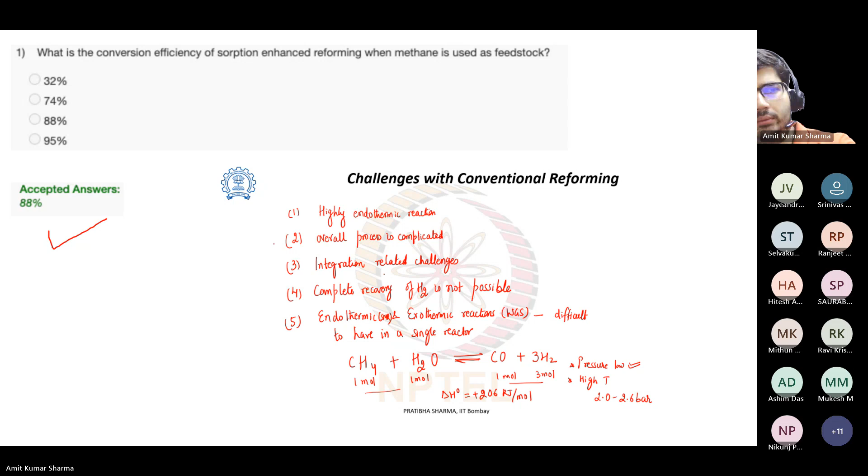If you have CO2, it can react with a sorbent and convert, so the CO2 will attach to the sorbent. The sorbent A becomes A dot CO2. In this way you can remove and separate out the CO2. The overall reaction is: CH4 plus 2H2O plus A (sorbent) becomes 4H2 plus A CO2.

The conversion of methane is 88%. The purity is 95 to 98 volume percent H2, giving 3.46 mole of hydrogen per mole of CH4, versus 4 mole of H2 per mole of CH4 in steam reforming. So steam reforming gives 4 mole, but this process gives 3.46 mole of H2 per mole of CH4 - less fuel required and it is a thermoneutral process.

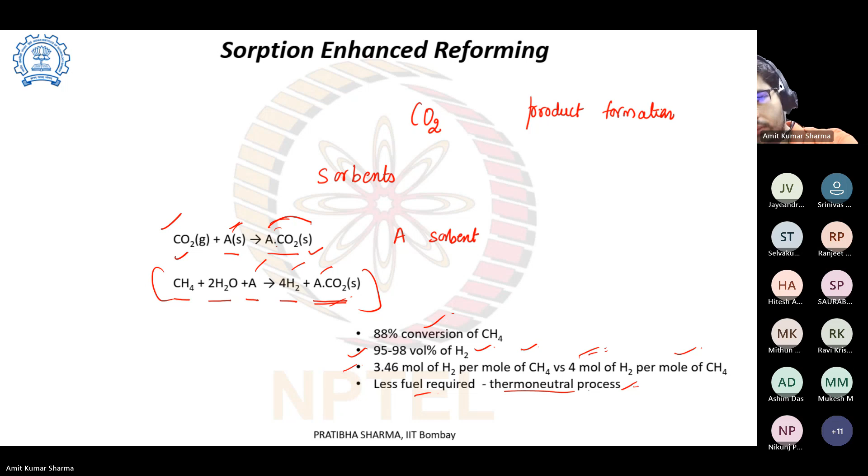So, what is the most widely used sorbent in sorption enhanced reforming process for hydrogen production? The answer is calcium based. You can have different types of sorbent, but the most widely used is calcium based.

For regeneration you need to maintain high temperature. It will regenerate, releasing CO2 from the calcium carbonate, which you can separate out and sequester in a carbon capture, utilization, and storage unit. You can then supply the calcium oxide back into the reforming reactor, and in this loop the whole reforming happens, giving you pure H2.

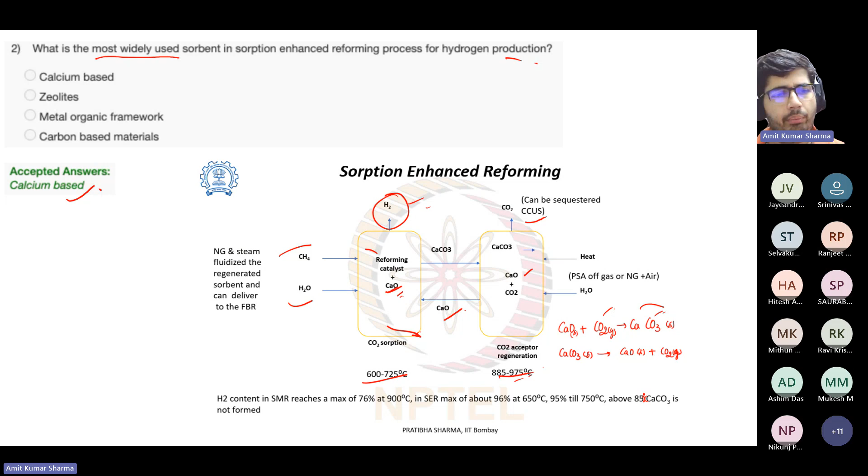The beauty of the system is that we don't require a water gas shift reactor. The purity of hydrogen is high directly because the CO2 is directly removed, and if you only have methane, you can get pure hydrogen directly.

The H2 content in SMR reaches a maximum of 76% at 900 degrees. In sorption enhanced reforming it can go up to 96% at 650 degrees centigrade only. So in SMR you need 900 degrees to reach 76%, but in SER you achieve 96% at 650 degrees, and 95% till 750 degrees. Above 850 degrees, calcium carbonate is not formed, so this reaction will not work above 850 degrees centigrade.

So this is about sorption enhanced reforming, and the widely used sorbent is calcium based.

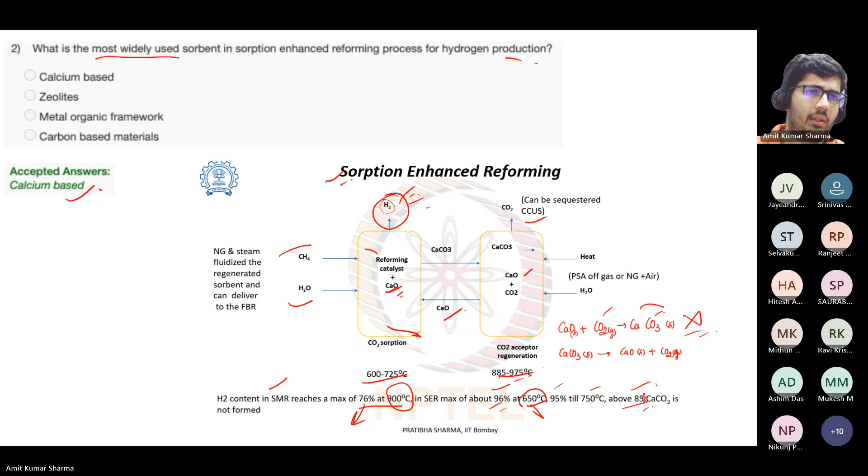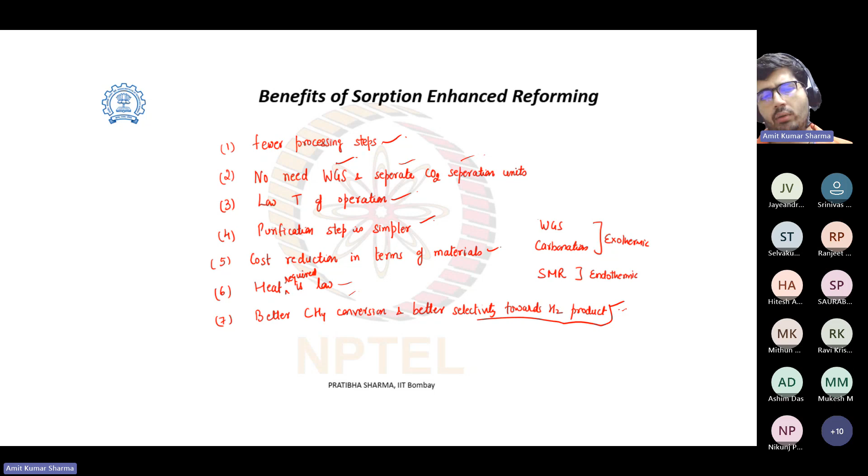Now, what are the benefits of sorption enhanced reforming? As discussed, there are fewer processing steps, no need for a water gas shift reaction, separation of CO2, lower temperature of operation, simpler purification step, cost reduction in materials, lower heat required, better methane conversion, and better selectivity towards hydrogen product. So we get more hydrogen and better conversion - these are the benefits of sorption enhanced reforming.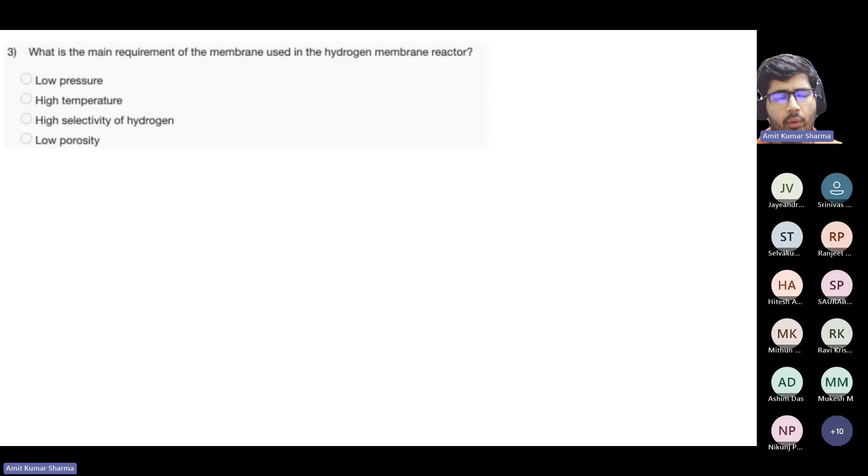What is the main requirement of the membrane used in the hydrogen membrane reactor? Low pressure, high temperature, high selectivity of hydrogen, low porosity. Because if we are using a membrane separator, this membrane should have high selectivity of hydrogen, so that most of the hydrogen can be separated out. The answer is high selectivity of hydrogen.

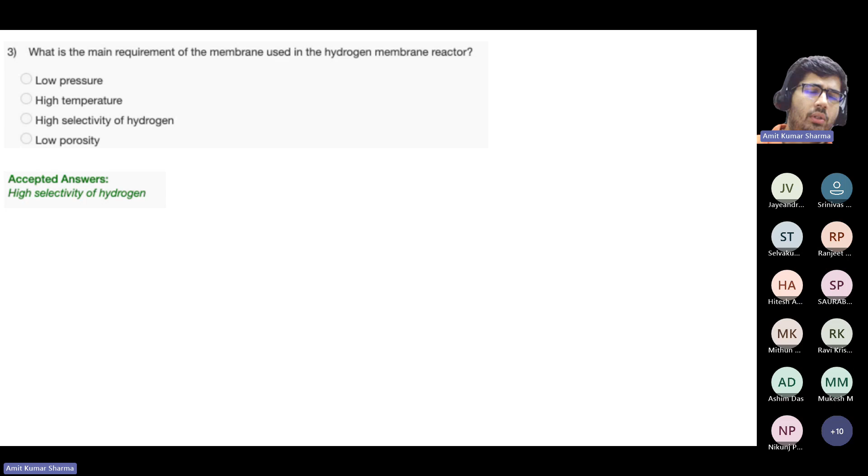The temperature required during the non-catalytic partial oxidation reaction used for hydrogen production lies in the range of 800 to 900 degrees centigrade, 1200 to 1500 degrees centigrade, or 1600 to 1700, or 220 to 250. 1200 to 1500 - so we have option like 1200 to 1500. Anybody else?

So you all are right. The correct answer is 1200 to 1500. And where do we use this non-catalytic partial oxidation? When we have different kind of feedstocks, wide variety of feedstocks. We have heavy oils like residual of refineries processes. So we can use this method.

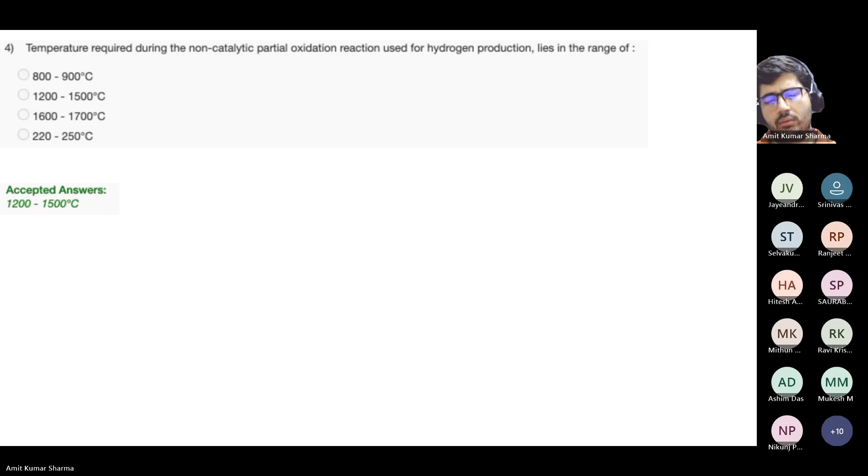And what about the pressure? What is the pressure range? It is 50 to 60 bar. 50 to 80 bar. Yeah, 50 to 80 bar.

What is the temperature range of the catalytic partial oxidation process used for hydrogen production from hydrocarbons? 600 to 900.

So sometimes you can also go from the options. You know option D, 220 to 250 - it is wrong because at this temperature no reforming will happen. 400 to 500, again it's low. Then 1200 to 1500, it's high - so it's for the non-catalytic. Then only the remaining option is 600 to 900 degrees centigrade. So sometimes if you have some confusion, try to go by options. So the correct answer will be A.

Now what happens in catalytic partial oxidation? Since we are using a catalyst, this will lower down the temperature requirement. The temperature earlier required in the non-catalytic one was 1200 to 1500. If you are using a catalyst, that will lower the activation energy, so the temperature requirement will be lower. The required temperature will now be in the range of 600 to 900 degrees centigrade.

It increases selectivity of product, mostly reported for methane, but can also have higher hydrocarbons, syngas selectivity, and higher methane conversion above 750 degrees centigrade. These are the reactions involved in the catalytic partial oxidation.

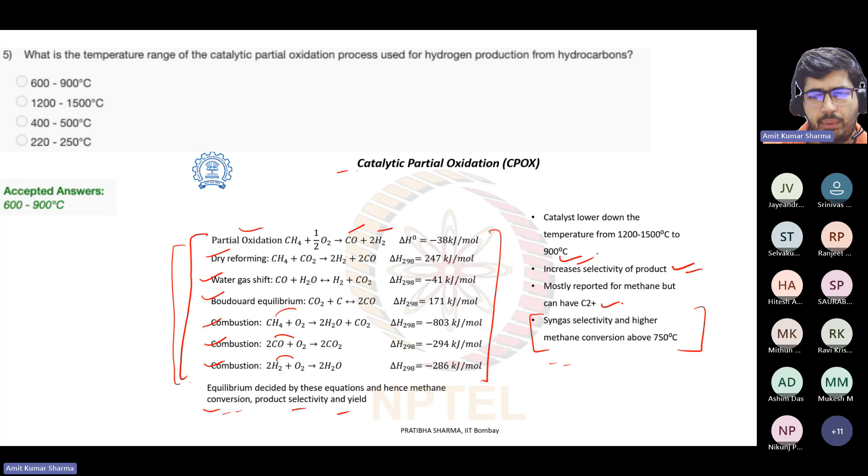So the equilibrium is decided by these equations, and hence methane conversion, selectivity and yield - these three things will be decided based on these reactions, and this reaction will depend on the operating conditions, feedstock, temperature, pressure, and these things. Okay, so these are dependent.

So in summary, for catalytic partial oxidation, it requires high temperature, short residence time, heat and mass transfer, and there can be hotspots. Gas composition is determined by many factors like feedstock, thermodynamics, and catalyst. It requires small footprint, can have modular construction, simple operation, fuel flexibility, flexibility in production capacity, lower capital cost, and energy consumption. Now, what are the challenges?

The challenges are short lifespan of the unit due to carbon formation and catalyst sintering. So there can be carbon formation and sintering, which will damage the catalyst.

To achieve high purity undiluted syngas, oxygen is preferable to air as an oxidant, which requires additional cost of gas separation. So for having high purity or undiluted syngas, meaning there will be no nitrogen, you need to have a different unit for air separation, which will increase the cost.

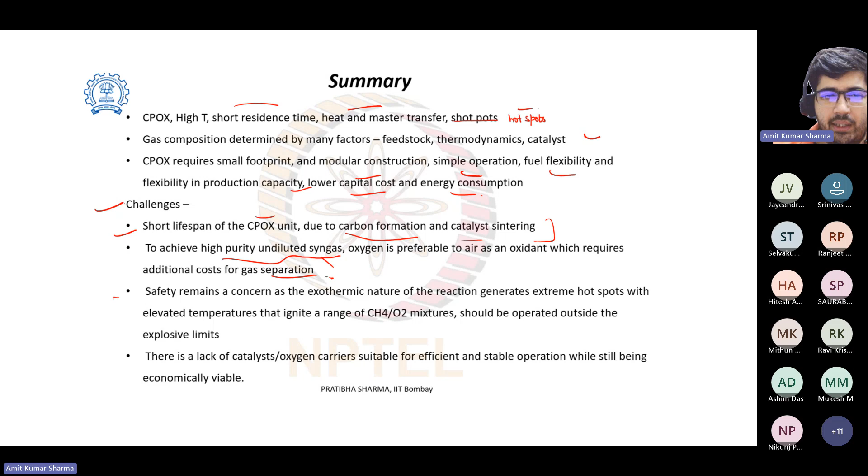Safety remains a concern as the exothermic nature of the reaction generates extreme hotspots with elevated temperatures that can ignite a range of methane and oxygen mixtures, so it should be operated outside the explosive limit. Because you are having a fuel and oxidant together, it can ignite - it can be explosive. So the temperature should be below the explosive limit. There is also a lack of catalyst or oxygen carrier suitable for efficient and stable operation while still being economically viable.

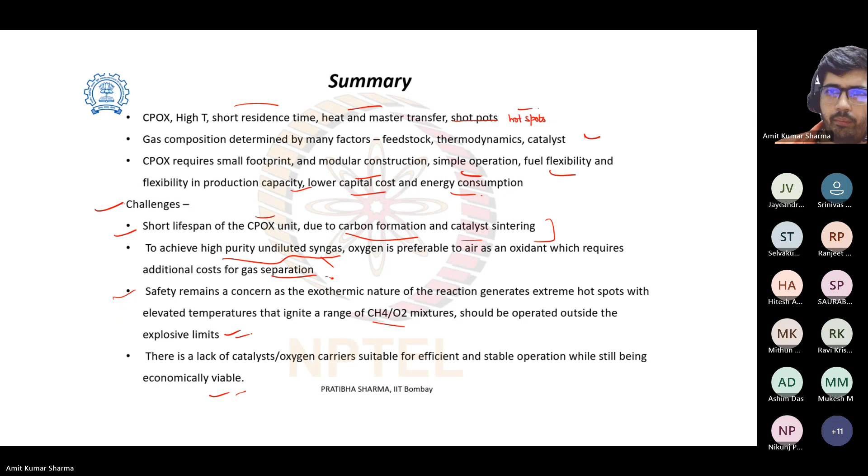What is the key component of ATR? Burner - the burner inlet, shape, tubes, outer shell. Yes, burner. Do we have tubes in the ATR? No, no. Tubes are normally used in the steam methane reforming reactor. So the main thing is the burner.

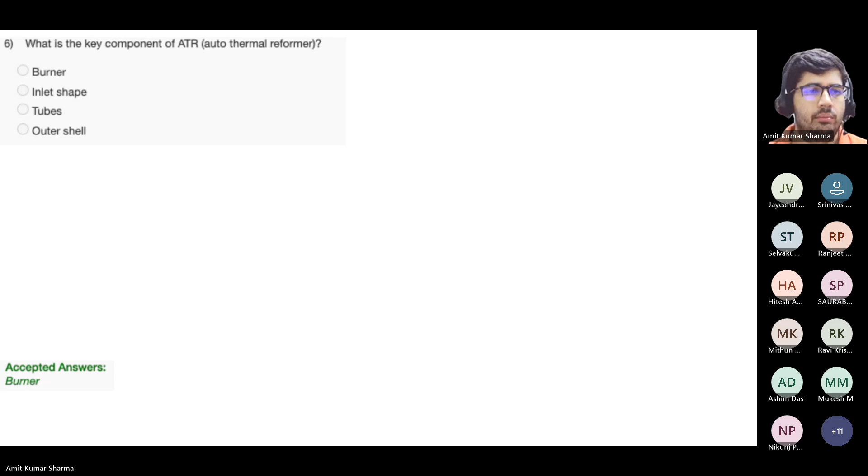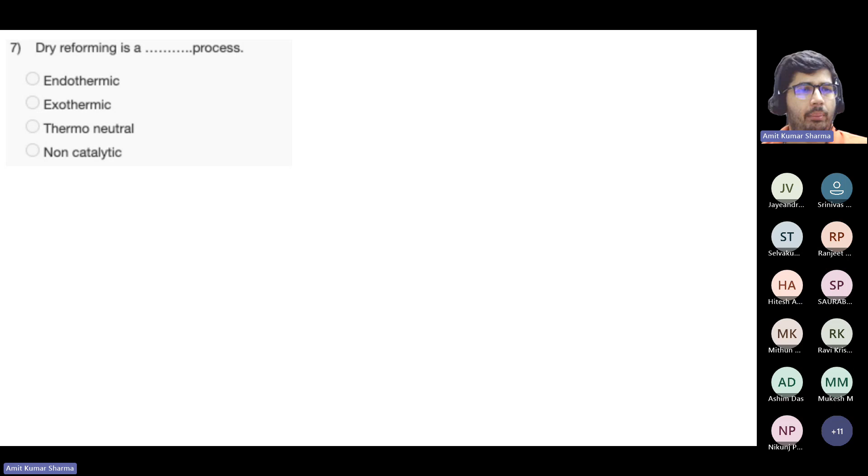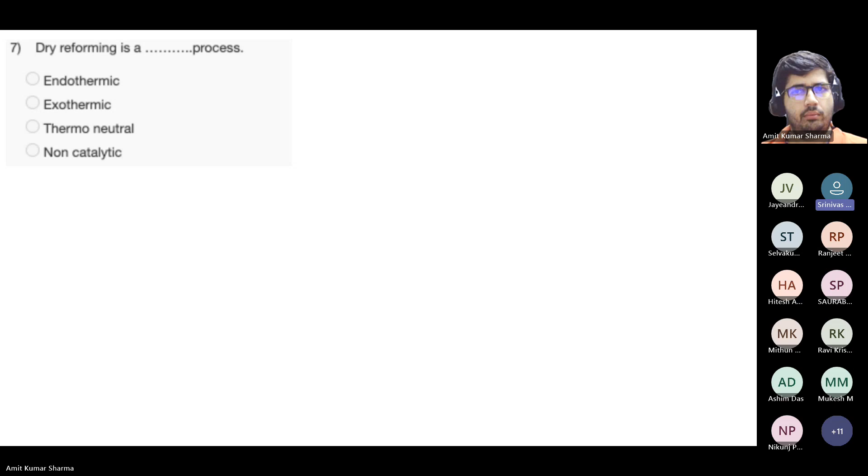Dry reforming is a process - endothermic, exothermic, neutral, or non-catalytic? It's endothermic. Okay, the correct answer will be endothermic process.

What is the temperature range of dry reforming of methane? 900 to 1200 degrees centigrade. It will be 900 to 1200 degrees centigrade.

What is the H2 to CO ratio in bi-reforming process used for hydrogen production? It's 2. We have an answer, 2. Anybody else?

What is bi-reforming? It is the combination of dry reforming and we are adding the steam - meaning SMR. So you are having the combination of both. That is bi-reforming. Anybody else?